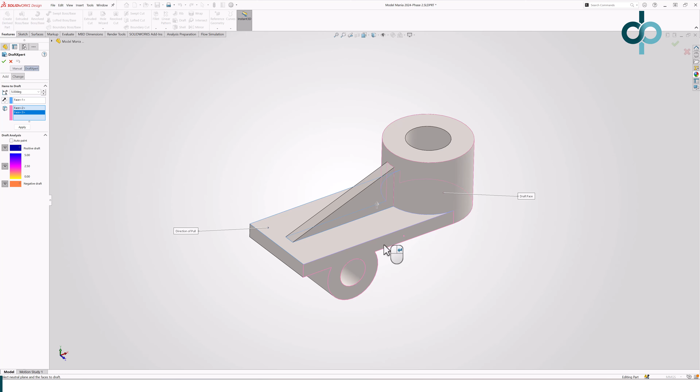It's easy, just find the angle, the reference plane, and then choose the faces to be drafted. Next, we'll turn to the rib to create that draft as part of the feature. You'll see this option in a lot of features in SOLIDWORKS, but maybe you've never used it. Just turn it on by selecting it and then define the angle. If you didn't know this, there's no way you were going to get this done quickly.

Now let's move on to show you how we did this step by step. Let's start with our units. It has to be the first thing you do in Model Mania. Here, we're working in millimeters.

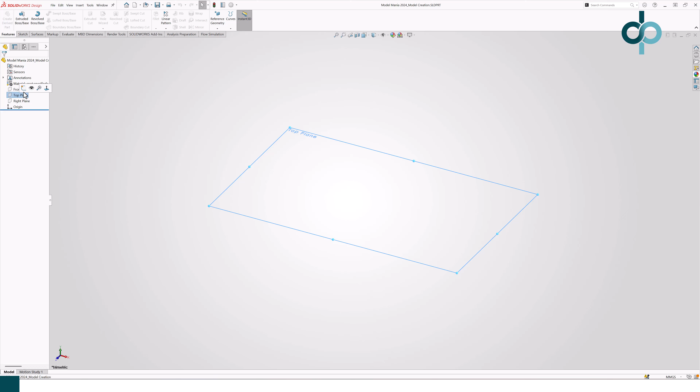Now we'll create that rectangular boss on the top plane. I want to start with a center rectangle right here on the origin. I'm using the S key to keep my attention focused here at the center of the screen. I define the dimensions here of this rectangle to be 30 by 80.

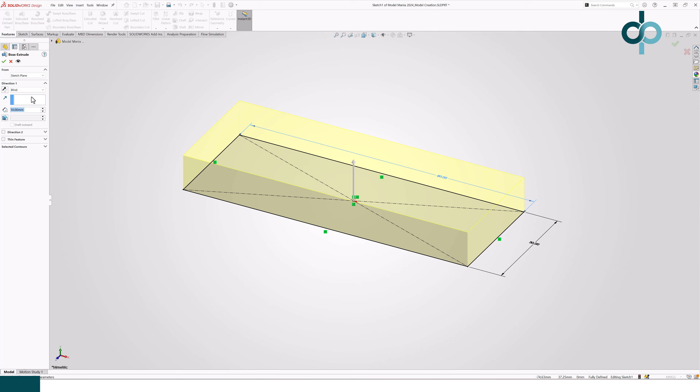And then we're ready to turn this into a 5mm extrusion. So we'll make sure that we're doing a blind extrusion up 5mm, changing the dimension here, hitting OK, and moving on now to create that circular boss.

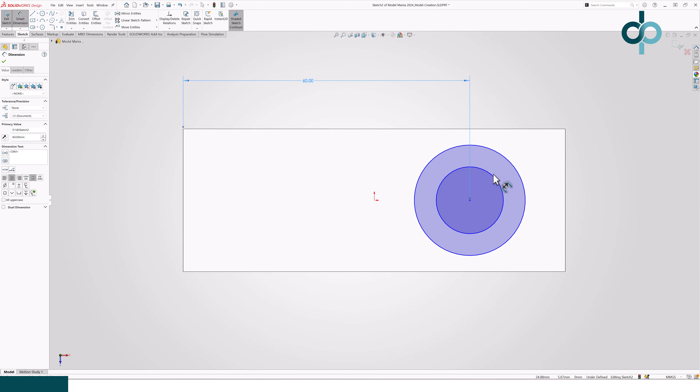Now with this circular boss, what I'm going to do is create both circles while I'm within the same sketch. I'll then later use contour select to allow me to leverage those sketches. What I'm doing here is saving time, minimizing the amount of times I need to create a new sketch, exit sketch, and all that.

So here I'm just defining the dimensions. We have it centered 60mm away from the left-hand side, just matching exactly what's in that PDF, horizontally aligned with the origin. 15 is the hole, 20 is the outer diameter.

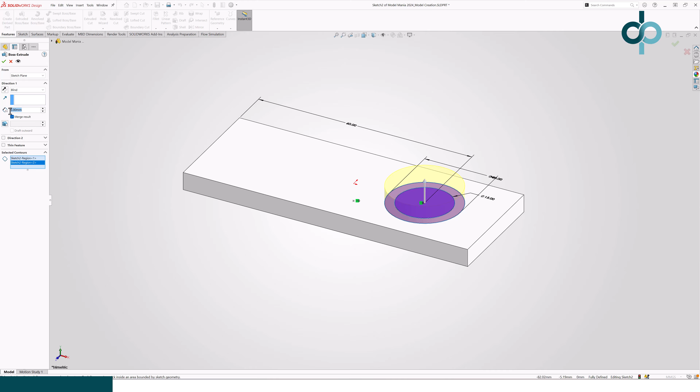Here is the trick. We got to make sure we use the selected contours option down here so that I can be sure I'm choosing the right things. There's other ways to do this, but I chose to go this route because I find that in Model Mania, edits and changes work really well when we use the contour select.

Now, I chose the sketch that I wanted to use, make sure I'm leveraging that. This is the only way you can reuse sketches here inside of SOLIDWORKS. So I'm using that sketch a second time here to create that 15mm diameter hole.

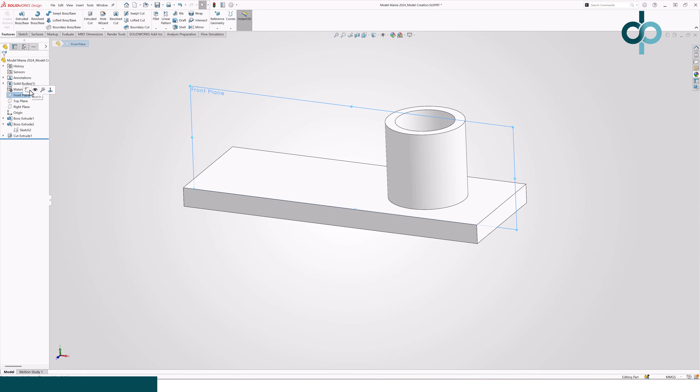Now I want to use the rib. This is really the only way you can create this type of feature easily. Yeah, you could sketch it. Yeah, you could do other things, but with just a line dimensioned properly here.

15 from the face to the top point, and then we have 5 from the left edge to the other point. So just adding 2 dimensions, some references, and a single line, I can leverage the rib command to save a lot of time.

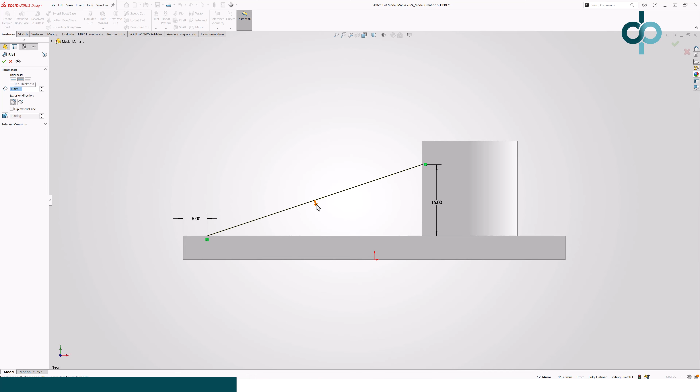So now I give it that thickness. It was 4mm, and I see that arrow pointing down. It's going to fill that in, give it that thickness, and just like that, I've created a pretty complicated shape. It would take a little bit more geometry and features to do otherwise.

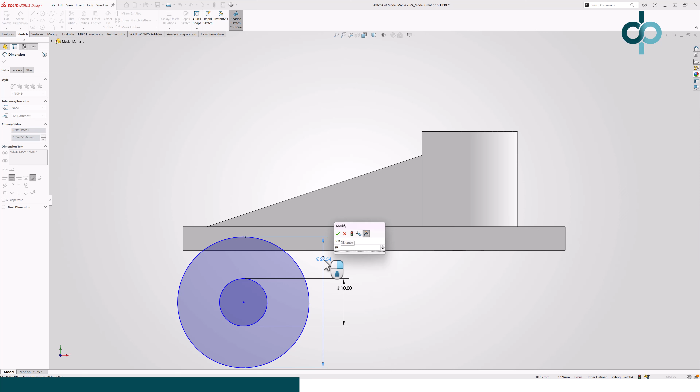Let's keep going here. I'm going to add this other circular boss. Again, same thing, I'm going to draw both shapes within the same sketch. Do I need to do it that way? No, maybe. It's just the choice that I made, and I'm going to go ahead with it.

10mm for the inside hole, 20mm for the outside base. And now I just continue defining it, 10 from that top face, and then 20 from the left-hand edge. And then what I need to do is create an extrude to go up to that other side.

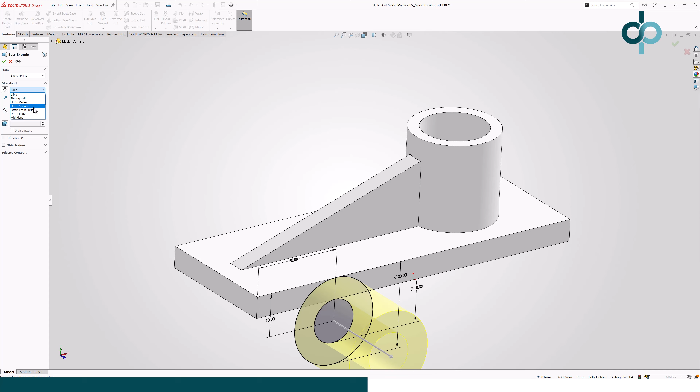I'm not going to key in a dimension here. What I'm going to do is use up to surface in case things change. It's a little bit more of a robust model. It works kind of how I want to. And just like that, I have the overall shape.

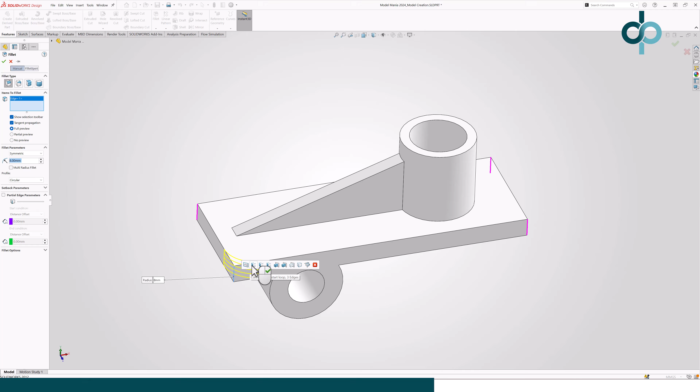Now the last little bit is just the fillets. So I'm going to add first the 8mm fillet on all 4 corners. Anytime I'm adding fillets, what I want to do is click an edge and pause and let this bar pop up right here to see what it suggests. And right away, I can, in one click, add those fillets to the 4 edges.

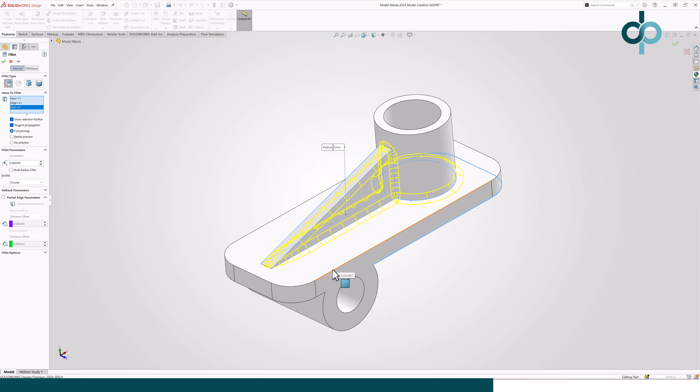Now, again, enter key right back into my fillet command, 2mm, and I'm just going to choose edges or faces, something to help me match this up to the drawing. So what I've done is I've chosen 2 faces there, added that, the bottom edge of that circular boss. I click this edge here and tangency takes over. Again, I click that edge, now tangency takes over. Just looking at different ways I can do this, that face, it adds a fillet to everything.

This is my shape, I think we got it. We're measured based on the mass. So let me add plain carbon steel as the material, evaluate mass properties, and look at the mass. And there we have our answer for Model Mania Phase 1.

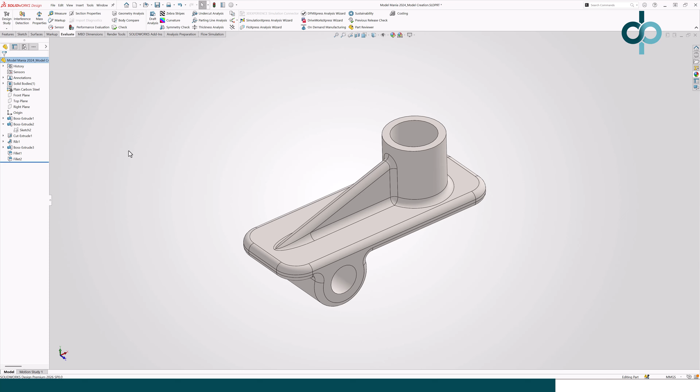Now we're given some changes, so let's go ahead and make our changes. I know immediately with these changes I'm going to have issues with the fillets. I don't feel like dealing with that, so I'm going to roll it back so that I can work on the overall shape. I know now that this boss isn't defined to be 20.

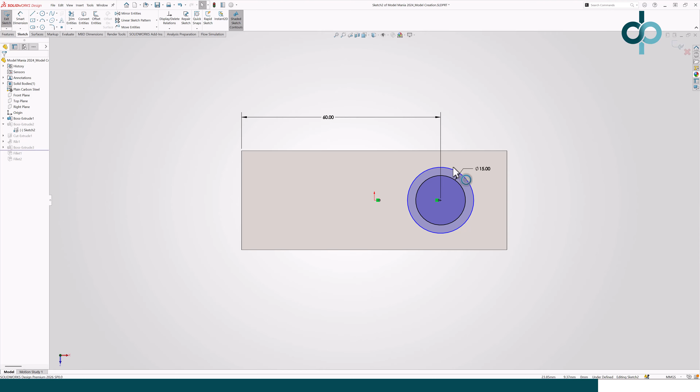I'm just going to delete that and use a relationship. This is supposed to be tangent to that face, that's literally what they wrote. So I'm just going to click that edge, holding the control key. I'm going to make it tangent, and that's going to define the shape.

So I'll exit this sketch. I'll take a look at it, and I know now I have to clean this up just a little bit. This is a competition, so instead of thinking about it, I'm going to do it the easiest way: sketch, convert entities, and cut.

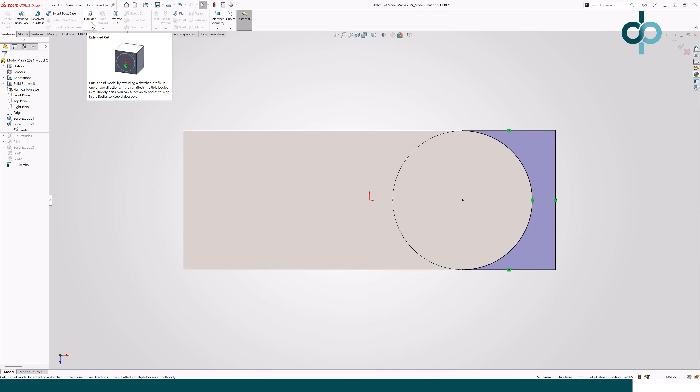This could be kind of sloppy modeling. I think it's pretty sloppy, but you know what, it gets the job done, and it gets it done incredibly quickly. Here we have the overall shape. I'm going to roll ahead so I can see the other bosses added to this.

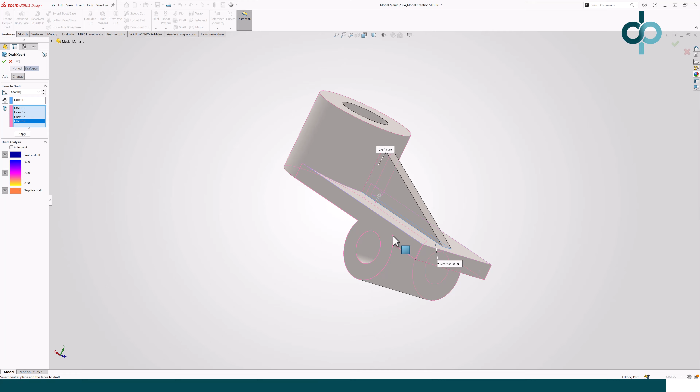And now I need to draft. We talked about this in the beginning of the video. So the draft command, first DraftXpert, 5-degree draft from that face. And I'm going to click 1, 2, 3, and 4 to add that 5-degree draft to these other faces. Hit apply, and there we go.

And again, second option here, press that button, 5 degrees to the rib. That option's there all the time in a lot of features in SOLIDWORKS, and a lot of people just don't know that. Now, why did we have to do this?

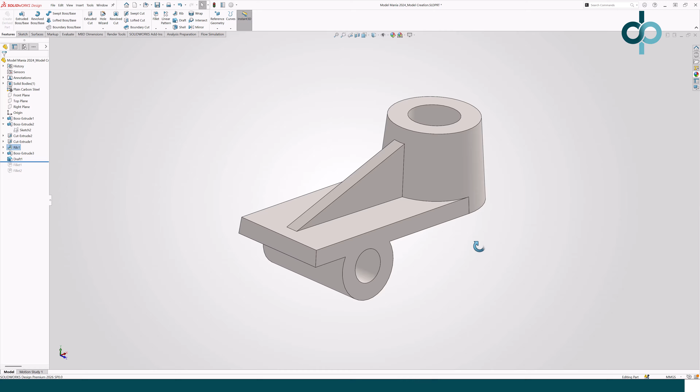It's because the rib is defined differently and it doesn't match up with that face, the neutral plane. If I click draft analysis here, what you'll see is if I key in 5 and then that reference again, you see how the rib is yellow and the other faces were green? It's measured differently, it's applied differently. It just doesn't work if you did it all with the draft. So the trick here is you had to do it both ways. You had to first know that it's there.

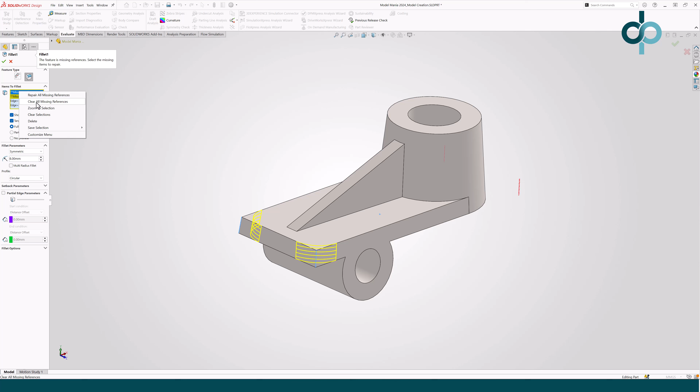Let's roll ahead now, we have some fillets. Obviously this was for 4 edges, some of them don't exist. We could right click and delete, but new option: clear all missing references. It just cleans that up for us. 2 is okay, but imagine if that was 20 fillets. Roll it ahead, we're done. That's Model Mania 2024.